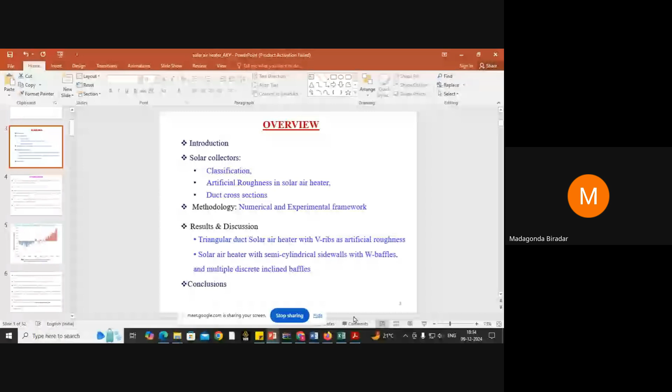Yeah Madhu, can you hear me? Yes sir, your voice is audible sir. Okay, thank you. Sir, you can share your screen sir. Yeah Madhu, yes sir, it is visible sir, is it visible, my PPT? Yes sir, yes sir, okay.

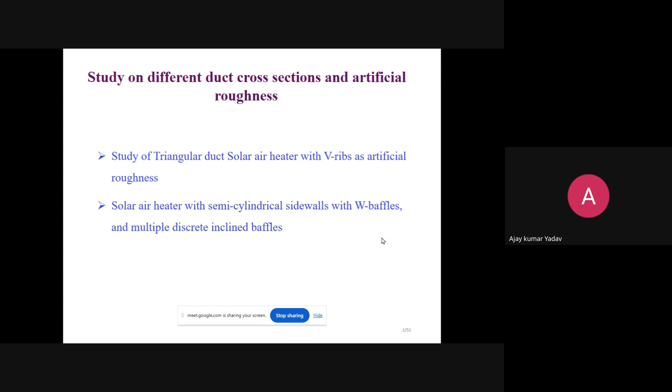Mainly I'll talk on two broad areas here. One is study, meaning my research part: study of triangular duct solar air heaters with V ribs as artificial roughness, and another one is solar air heater with semi-cylindrical sidewalls. But these two areas we'll talk about in the later part. Before that, we'll talk about the introduction, because these things will go in the research part mainly, since not all are from a thermal background, so I will explain that a little bit.

But the detailed introduction will be interesting for all of you. In this I'll go through the different types of solar collectors, classifications, and artificial roughness in solar air heaters. I'll also talk about solar air heater applications and different duct cross sections.

The things I'm going to talk about here are: artificial roughness in solar air heater, why this is required, duct cross sections, then the solution approach - numerical and experimental, mainly the different softwares people are using or writing codes - then some results and discussion, and conclusion.

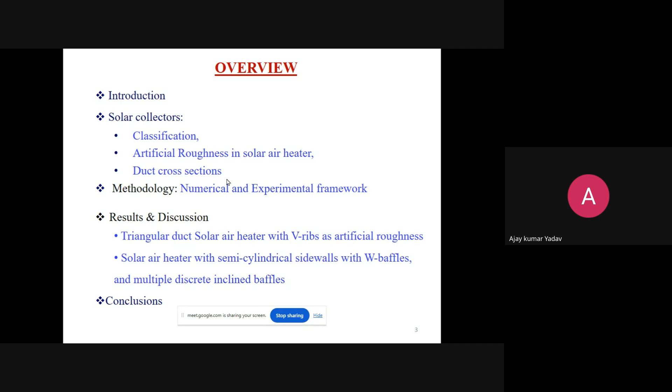This is the very common reason why we go towards the renewable energy side. One major part is the pollution part. We burn fossil fuels, coal, gasoline, diesel, and this is creating pollution. Another thing is the depleting source, so availability is also a question mark after a few years.

So the thing is, we have to move towards the renewable energy side, and sun is the better option always. But how much we can harness from the sun, that matters now. So how to increase the efficiency, those things we should think of. So one thing is, why not photovoltaic? Photovoltaic cell, the efficiency is very less, you know that.

Photovoltaic cell is having efficiency of around 15 to 20%. Generally you can consider 15 to 18% in this range. So efficiency part is we need to work on that, and we have to increase the efficiency.

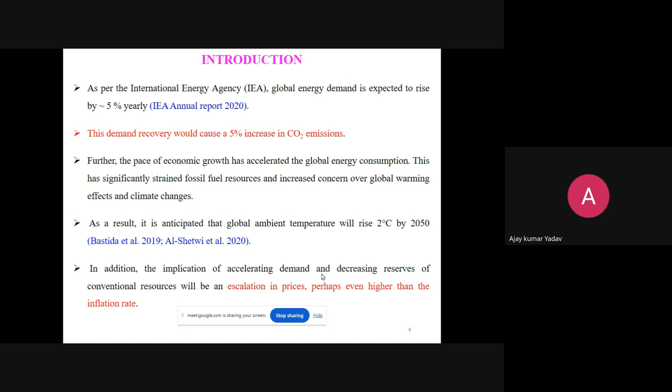But before that, this is the introduction part - first let me talk about global warming and all things. It is better to go for solar. It is expected to increase 2 degrees Celsius by 2050, this ambient temperature, global ambient temperature. And the escalation of price is even higher than the inflation rate for fossil fuels, conventional sources of energy. So this is one motivation why we are going towards solar energy.

These are the data we can generally get from some reports. In India, gross petroleum import accounted for over 19% of India's total imports in 2020-21. Coal also, India is the second largest importer of coal. So these are the things you can see, how much we need fossil fuel to fulfill our energy demand.

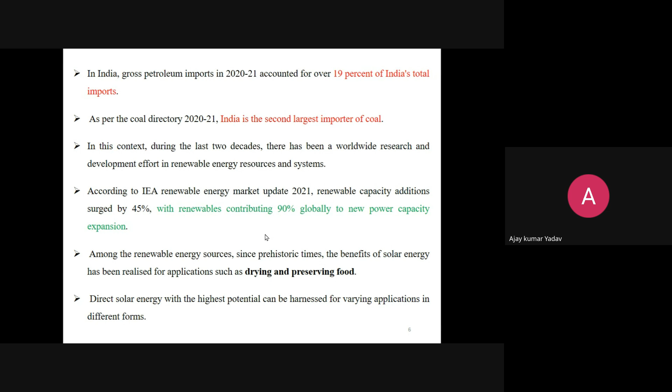Solar energy part, solar air heater, the major application of the solar air heater is in the food industry, drying the food product. Hot air from the solar air heater can be used for various low to medium temperature applications, mainly drying of agricultural products.

For a developing nation, where agriculture forms the backbone of the economy, drying and preserving farm harvest is of prime importance. There are indirect type solar air heaters, direct type solar air heaters, different types we can use.

Another use of the solar air heater is space heating of buildings. In winter season you need hot air. If you use a normal PV cell and electrical heater, mainly in the north side in a very cold environment, that consumes a lot of energy. If you directly use a space heater solar-based system, air heater has less efficiency than water heater because water has better conductivity than air. Even if you get 60%, 50% efficiency, that is much better than the 15% of the photovoltaic cell. So these are the things space heating you can use.

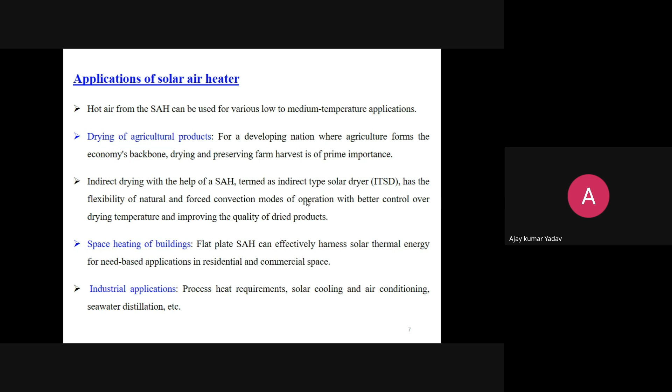Parabolic trough collector and dish type collectors - these are the things. If you need high temperature, you need such type of concentrated collectors. This is parabolic and this is dish type. Dish type, if you use for water, you can go up to 800-900 degrees Celsius. To run a thermal power plant, you can go for this. People have tried that also, solar thermal power plant, and some places it is running.

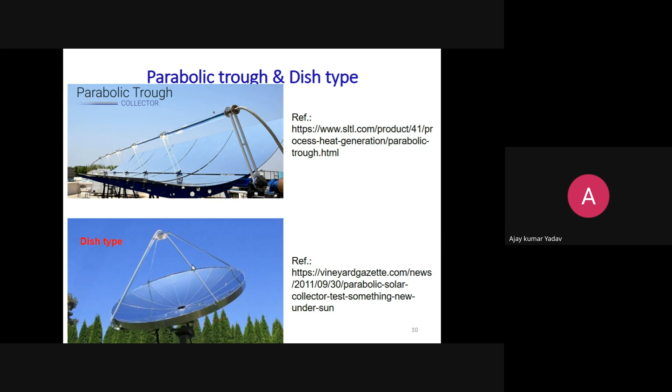But as you go higher and higher temperature, there are losses also - efficiency of the solar collector will drop. Here you are using free energy, but efficiency matters because the photovoltaic cell is easier to handle. Here you need collector part, then turbine part, then generator - many moving components will be there. So initial cost will be very high if you use solar thermal power plant, and efficiency also may come close to 20-25% in that range.

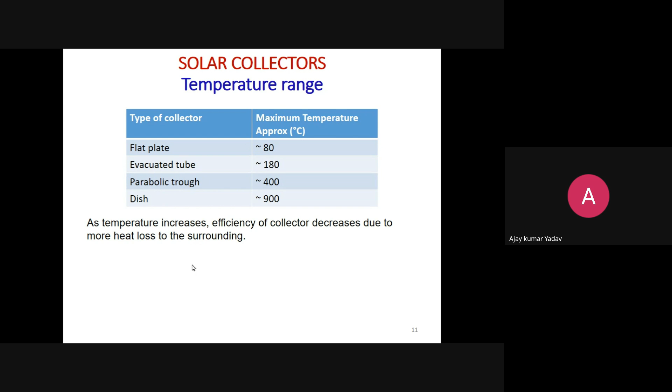You can see the maximum temperature you can get using flat plate, evacuated tube, parabolic, and dish - 80, 180, 400, 900 degrees Celsius you can go. So as you increase temperature, your efficiency will drop. That is the main drawback here.

Now I'll talk about the flat plate solar air heater. Solar air heater generally looks like this. It's simple in construction, very easy to make.

So in that, this is the glass part. Solar radiation will be absorbed here. You can see the cross-sectional view or side view. On the top is the transparent glass cover, and this is the absorber plate. In between, you can create vacuum.

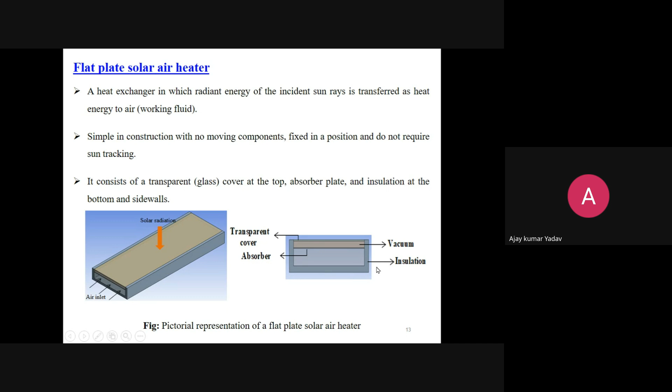There are different types of solar air heater: class 1, class 2, class 3. In some places vacuum is not there. If you use vacuum, the losses will be less. This is the normal construction, with simple side walls that will be insulated. Here air will flow in between this part.

So you can see here the classification of flat plate solar air heater. This one is the transparent cover, the glass, and this is the bottom insulation, and in between on the side. But on top of the insulation is the absorber plate, which will absorb the solar radiation. This will generally be black chrome coated, so like a black body it accepts all the radiation, and it will absorb with absorptivity close to 100%.

So this plate will get heated, the absorber plate, and in between this glass and absorber plate there will be airflow. So when air flows, it takes heat from this absorber, gets heated, and passes through, and after this outlet you can use the air for your application, like drying food products or agriculture products. So this is class 1, type 1 flat plate solar air heater.

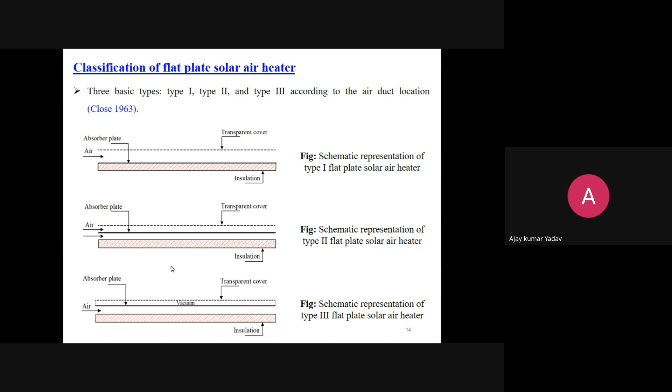Now, the solar air heater has low efficiency compared to a water heater. The reason is air has very low thermal conductivity - this is the one major reason. So how do we improve the efficiency? We need to improve the heat transfer coefficient, which is always higher in the case of turbulent flow.

So you have to put artificial roughness to create turbulence. How to do that? If it's just a smooth normal channel and air is flowing, a boundary layer will be created on the flat absorber plate. Once the boundary layer develops, the heat transfer rate will reduce. At the leading edge, where the plate starts and flow is coming in, the heat transfer rate is always very high.

So that concept we have to think and implement here: we should break the boundary layer. First break it, because a thick boundary layer will be formed, so we need to break it. And within that boundary layer, a laminar sublayer will be formed. So up to the thickness of the laminar sublayer, you have to put artificial roughness, some fins-like structure in that.

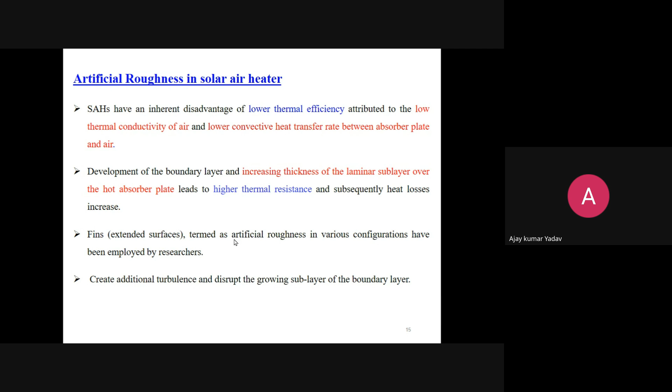Now the thing is, if you are putting ribs, like fin-type structures, there will be pressure drop and Nusselt number will increase, heat transfer coefficient will increase. So two things: one is increasing, pump power is also increasing. So one is favorable, Nusselt number increasing is the favorable condition, but friction coefficient increasing is not favorable.

So there is a parameter called thermohydraulic performance parameter. There's a relation: how much Nusselt number is increasing, mainly representing heat transfer coefficient, and how much pressure drop is increasing. The ratio of these two has a relation, not a direct ratio, and that will say whether it is more than one. It should be more than one, otherwise it's not justified to use, so we will evaluate based on that.

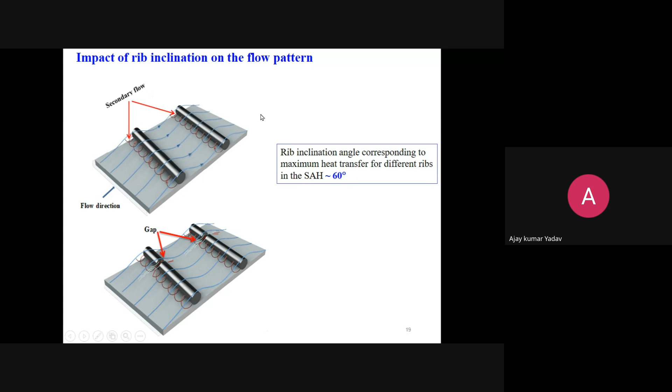Now the impact of rib cross sections. What I showed earlier was a circular, cylindrical cross section of the rib. You can put different shapes: the first one is square, then triangular, with flow coming from this side, and this one is circular. Different people have tried different shapes, such as Singh and Singh 2018.

In recent developments, people have worked on different ribs, different cross-sectional areas, and duct cross-sectional areas, along with ribs of different shapes. So we can see what happens if you put a square type versus triangular or circular shape. The square type is a rough type of structure, this one is slightly smoother than square, and this one is more smooth. If you put a smoother shape, separation will occur late, whereas in the square case it starts right at this point.

Here it is starting. Slowly it is getting delayed on this side. So smooth - if it is streamline flow, you should have this smooth surface. But with streamline flow, we don't want this. We want turbulence, more turbulence in this.

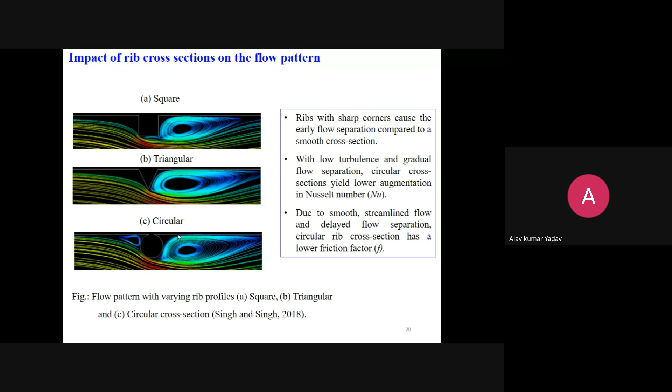So for that, we have to compare the Nusselt number of a rough surface and a smooth surface. Rough means with rib, and smooth surface - what is that ratio? And friction factor, rough and smooth, what is that ratio? The friction factor ratio we have to raise to the power 1/3. That gives you THPP, which we calculate and then compare.

So these are the summary of research, the recent developments in solar air heater. Various types of ribs people have tried, some different cross sections also. There are many experimental studies done in this area, more experimental studies compared to CFD analysis.

So now people have started more on CFD also. Another thing is duct cross sections - people have not used different duct cross sections, there are fewer papers on this. The reason is flat plate and rectangular duct cross sections are easy to build, so people have used rectangular type more.

So what we will now - okay, one thing is I'm not able to see. Are you able to? I think Madhu, you can hear me, no? Not disconnected? No sir, you are audible. No problem, okay. Once I shared this screen, then I'm not able to see that side.

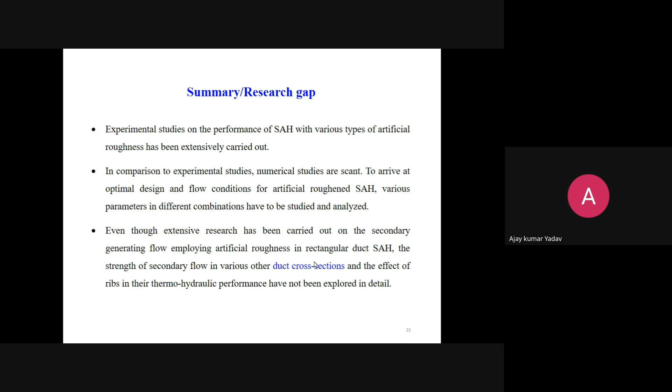So the next part is we are going to start this research methodology part. People have done numerical and experimental studies - oh sorry, I wrote both same here, numerical and experimental I wanted to write actually. So the numerical part, how to do numerical studies, I'll talk a little on that, and then the experimental part, how to do experimental study.

So the thing is, if you are doing research on this, I'll just tell you - this area, solar water heater, solar air heater, is going to become almost a saturated type of area. There is not very much to do in this, because people have already done a lot of work in this area.

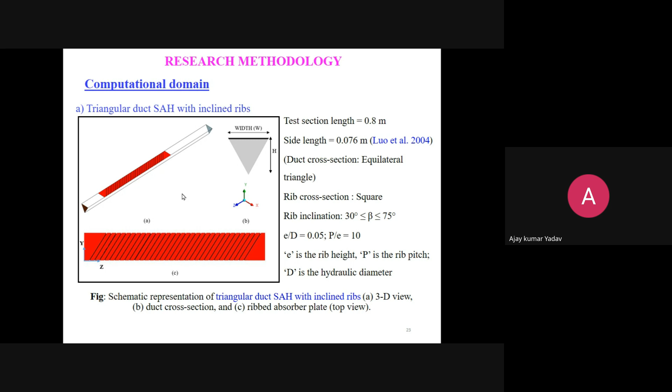These ribs here, you can say inclined ribs, are taken at different angles - we varied the angle, pitch, and roughness height. These things we varied. You can see here the V-type ribs we are using. The second one is triangular duct with V ribs.

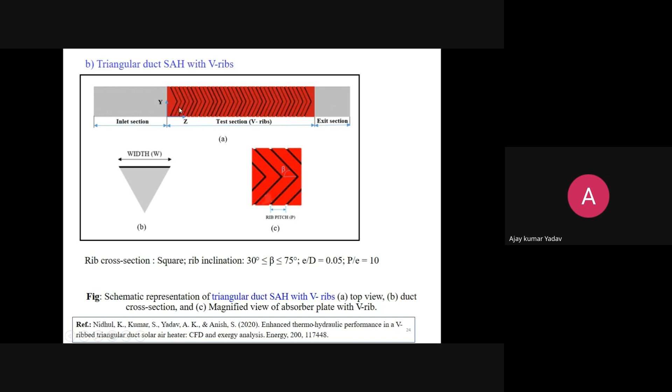One more thing is, if you are doing research, you should be careful about the inlet section - how much you should take, how much exit section should be there. This is an important part. Some people make a mistake here, they take the inlet section at some random value. That won't work, your paper will get rejected straight away. So you should see what the ASHRAE standard says - you can see my paper and other papers, reference them to see what should be the inlet section, exit section, and how long the test section should be. Because if you use a smaller or bigger size, the average temperature value will vary, and your result may not be validated with the published data. So you should follow the standard, ASHRAE standard, for how much length you should take.

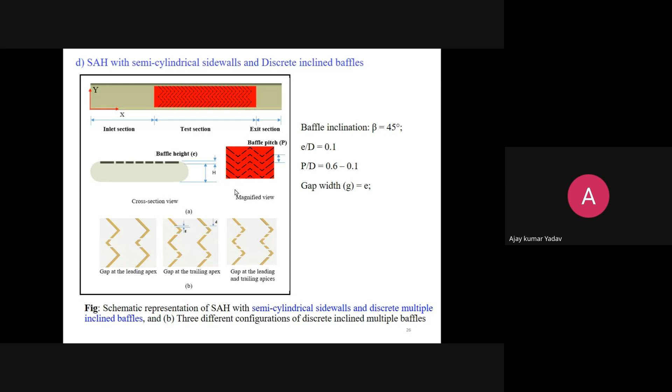So meshing you can do using ANSYS software. Two things mainly you have to find out: friction factor and Nusselt number. Once you find these two, then the ratio will give you the thermal hydraulic performance, and that is what you should compare. That is the non-dimensionalized number - even these are all non-dimensionalized only, this Nusselt number and friction factor.

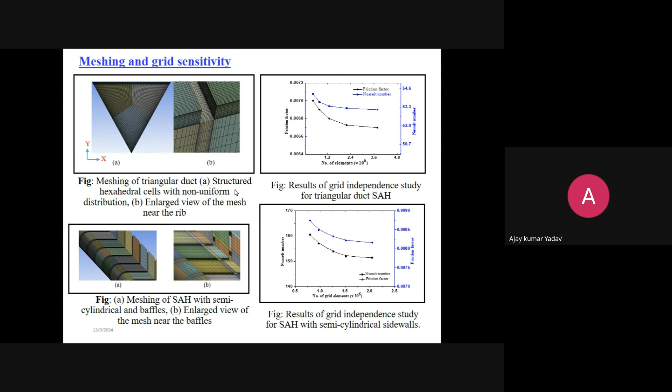You can see this - what duct size you should take, and what boundary conditions you should take here. You can see on the absorber plate, we are putting heat flux of 1000 watt per meter square. Generally the solar constant - you might have heard of solar radiation, how much is falling on the Earth's surface - solar constant is measured above the atmosphere, where it's around 1400 range, 1361.

Because we are doing the experiment on the ground, here it will be around 1000. It will vary, won't be constant throughout, depends on weather conditions and all. So we have taken here 1000 watt per meter square heat flux. This is outlet pressure, atmospheric pressure, adiabatic duct walls - these are the boundary conditions we have taken. For the duct inlet, we have given some velocity.

Okay, so different Reynolds numbers we have studied here: 4000, 8000, 12,000, 16,000. First thing is how to choose the turbulence model. We selected different turbulence models and chose which is best suitable. You can see the Dittus-Boelter correlation, the very famous correlation for Nusselt number, and we can see it is close to RNG k-epsilon. Based on that, we have chosen the RNG k-epsilon model. So you can try different conditions, different types of geometry, and select the turbulence model.

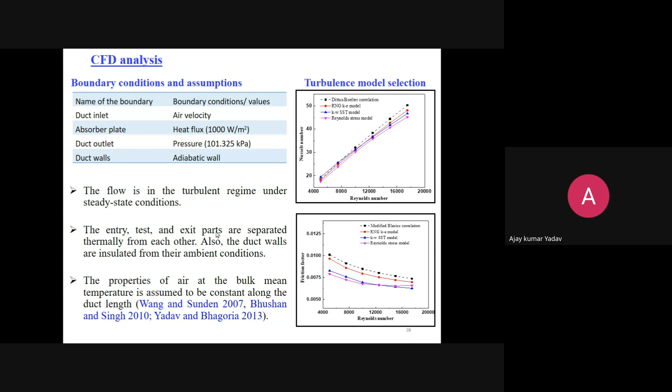Here you will see what I was telling about thermohydraulic performance parameter, THPP. There is the Reynolds number definition, these are the basic parts, and heat transfer coefficient, how to find this. Here people often make mistakes. This Q we are supplying, like 1000 watt per meter square. TP and TB you will find using experimental work or CFD studies. In CFD study you will find TP, TB with the average temperature. TB is the bulk mean temperature. How you are calculating this matters.

Also, if you take a smaller size of the test section, this will vary, and your data may not match. So these things you have to be careful about.

Nusselt number you calculate, then friction factor based on the pressure drop, you will be able to calculate this. Once you have both, the thermohydraulic performance parameter will be Nusselt number of the rough surface divided by Nusselt number of the smooth surface, the normal value. Without putting ribs, you get one Nusselt number, and with the rib, how much Nusselt number. The ratio gives you how much increment there is. Then friction factor with rib and without rib is divided, because more friction is an unfavorable, not desirable condition.

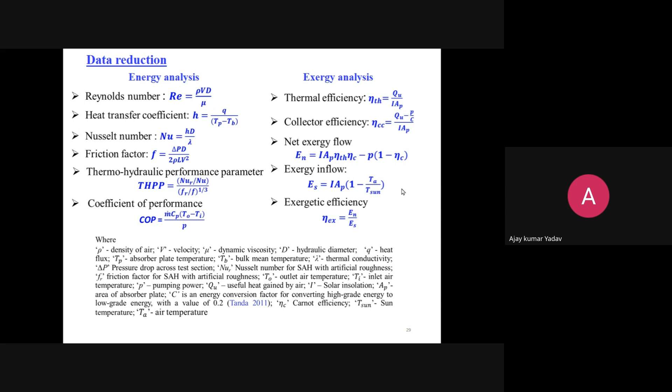This is the experimental setup of a solar air heater with semi-cylindrical side walls and discrete multiple inclined baffles. This type of baffle we made for this experimental study. You can see number 2 is the test section here. From the outer side it seems like a rectangular channel, but it is not. Inside, we have put a semi-cylindrical channel, so people can study different cross-sections. There are fewer papers in this area, so if you are working, you can try this too.

You can see here how to put the thermocouple, on the back side. You can put 3 here, 1 here, then 3, 1, 3, like this. In between the main and at the center, you get a temperature profile because more thermocouples are there. The more thermocouples you put, the better the average temperature value you get. People often just divide the outlet by 2, but that will not give you the exact value—you should put more thermocouples. That's the reason if you go for CFD study and experimental study, there will be a difference in the result.

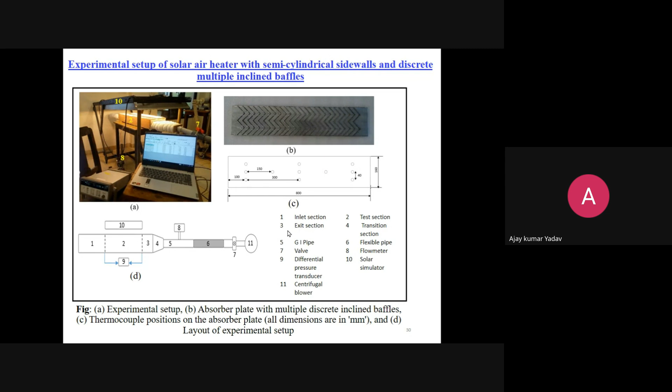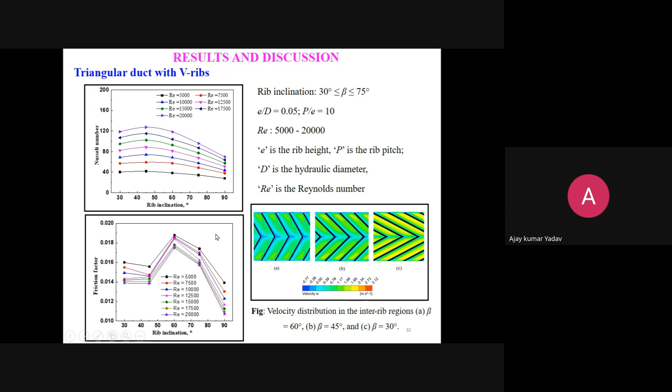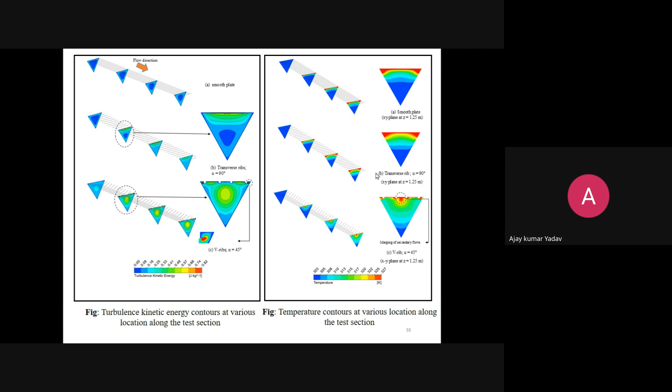So these are the different types of contours, you can plot nice beautiful plots in ANSYS Fluent. If you write code instead, getting this type of thing is slightly difficult, and you have to do the 3D coding with the turbulent model implemented.

So this is for the triangular duct thermohydraulic performance. The final comparison should be made using the thermohydraulic performance parameter - this will give you the exact comparison. Otherwise, Nusselt number may vary, but friction factor may also increase, so you cannot decide which one is better. The best thing to use is this parameter, thermohydraulic performance.

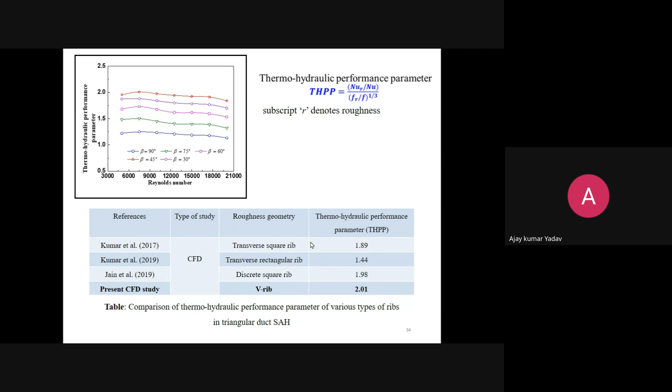Source temperature we consider here is the sun's temperature, which is very high. So however much you are able to utilize, that gives you the exergetic efficiency. This gives a very high first law efficiency, Carnot efficiency, because you're using the sun's very high temperature, but utilization is very low here - very low how much you can use, because the plate temperature you reach will be around 60, 70, or 100 degrees Celsius.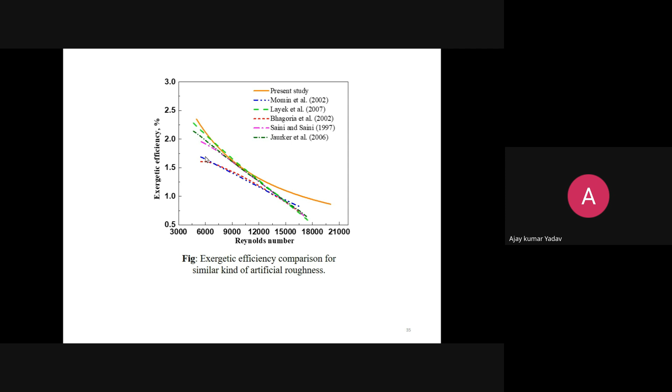So this much you are utilizing and getting the efficiency - the heat engine efficiency with sun temperature is very huge, so the ratio will be very less. That's the reason we are getting 2%, 3% exergetic efficiency in that range. This depends on which formula you are using for exergetic efficiency, but most people use the same one, so for comparison purposes we should use the same formula.

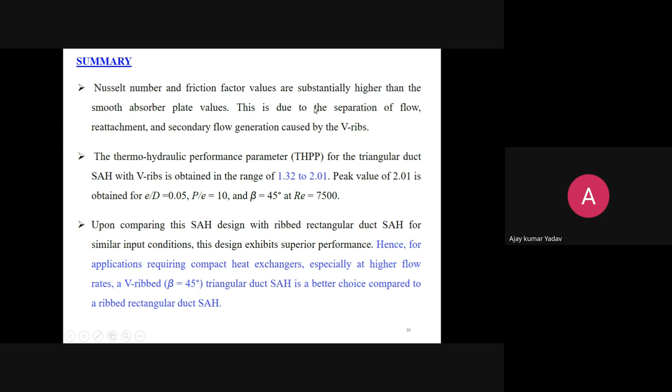This is the summary of this part we were doing for the triangular section. As I told you, we are getting 1.32, 2.01 thermohydraulic performance.

In this, we have taken a different rib, with inclined ribs. First one was without ribs, here we are putting inclined ribs. So here we have put different ribs and we get this type of graph comparing THPP between ribbed triangular duct and rectangular duct. Same rib we put in both the rectangular duct and triangular duct, then compared it. Using the rectangular duct, you get around 1.6, 1.5, the red one. And black, around 1.7, 1.75. This much difference if you use triangular in place of rectangular duct, so there will be advantage in this.

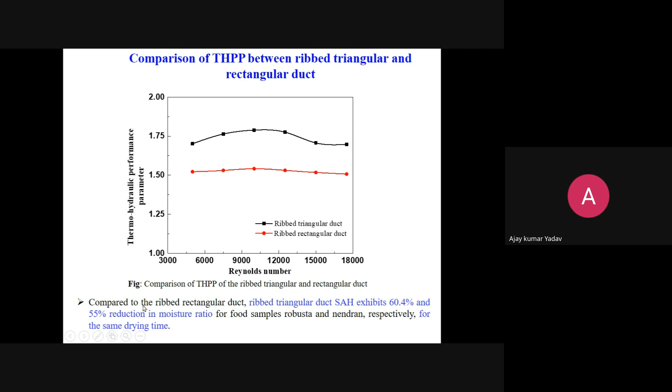Getting around 60.4% and 55% reduction. This is the moisture ratio. We tried experiments using this solar air heater for drying food products, banana and all.

So this is the summary of the second part. We'll go to this one: semi-cylindrical side walls and W-baffles. We have done CFD as well as experimental work for this. If you compare these two types, this is the rectangular one, this is the semi-cylindrical side walls - you can see it is smoothened. In the corner part of the rectangular, extra vortices were there; in the semi-cylindrical, that is gone, not there. So this is giving slightly better results.

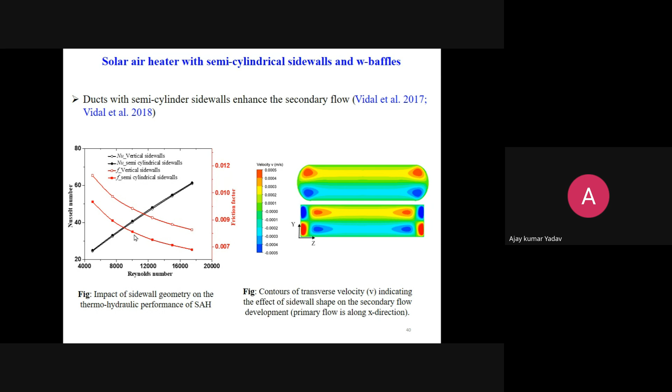This is the validation part - Nusselt number and friction factor with vertical side walls versus semi-cylindrical side walls. You can compare the Nusselt number - there is no change, almost same. But friction factor, there is a change. Vertical side walls have higher friction factor, but semi-cylindrical has lower friction factor. So Nusselt number is not changing, but friction factor, your pump power will reduce in the case of semi-cylindrical. This way you will get higher THP ratio.

Another thing is, if you put inclined ribs, there will be secondary flow, as I explained earlier in the introduction. That secondary flow creates additional turbulence. On this side you can see the secondary flow, how it is coming. So that enhances the heat transfer rate, or Nusselt number, you can say finally.

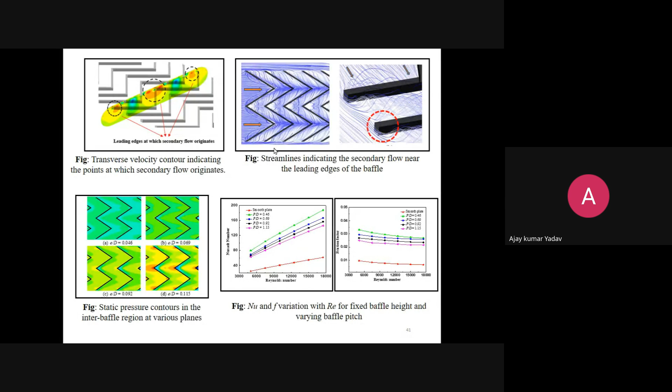So with semi-cylindrical side walls, you are getting around 2.27. You can see the changes. These are all rectangular, different baffles - you can say W baffle they have used here. They got 1.8, 1.9, around 1.98, close to 2. Here we are getting 2.27. This much change.

So let us see thermal efficiency here. This is the thermohydraulic performance with different pitch and ribs height. Comparing thermal efficiency, it is going around 72%, 71 to 72% in that range for present studies.

As I was talking earlier, efficiency has to increase, and this efficiency of 70%, if you compare with the photovoltaic cell, that is 15%. It's very high, 5 times higher. So for drying products, this has scope - this is a better choice.

So these are the things I already talked about. We are getting 2.27 here for THP. And you can see the exergetic efficiency part is around 0.02, meaning this is not a percentage - it will be around 2%.

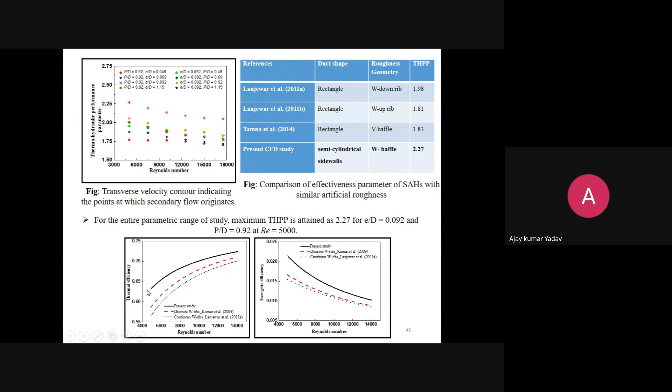You can see here the enhancement in energy efficiency and exergy efficiency - both I just showed you, the thermal efficiency is called energy efficiency. You can see the enhancement with this much you are getting.

And this is solar air heater with semi-cylindrical side walls and multiple discrete inclined baffles. There are multiple, but this is discrete, not continuous - till now we used continuous. This is discrete. If you use discrete baffles, this will give you thermohydraulic performance around 2.8, 2.7 in this range. If 2.69, yes, it is written here - 2.69. Here 3.07 - that is the friction factor increment.

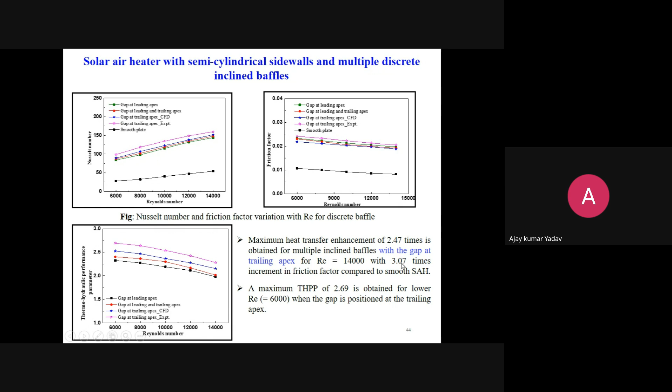2.47 times is obtained for multiple inclined baffles with the gap, for this times increment in friction factor. This 3.07 is the increment in friction factor - we don't want this increment in friction factor, we want increment in Nusselt number. So total Nusselt number increment is 2.47, and in this 3.07, the ratio you can see is 2.69, because here we have 1/3 in the friction factor, which is not the direct ratio.

So this is the semi-cylindrical side walls with square cross-sectional rib with discrete rib - you can say W type discrete rib. In the present study, we are getting 2.69 here.

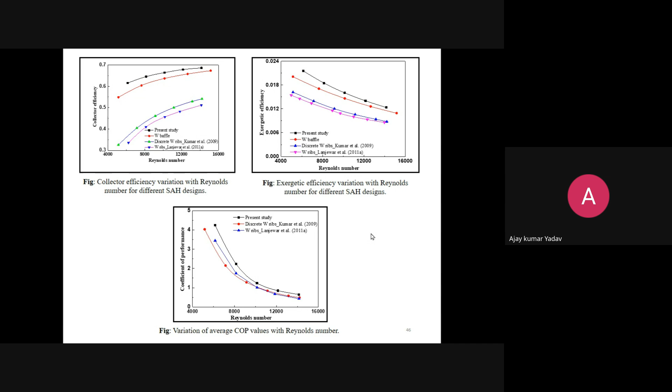These are the summary, almost the same thing is here. Up to 70% we are going to higher collector efficiency. And the other conclusions, details, what I already talked about in that.

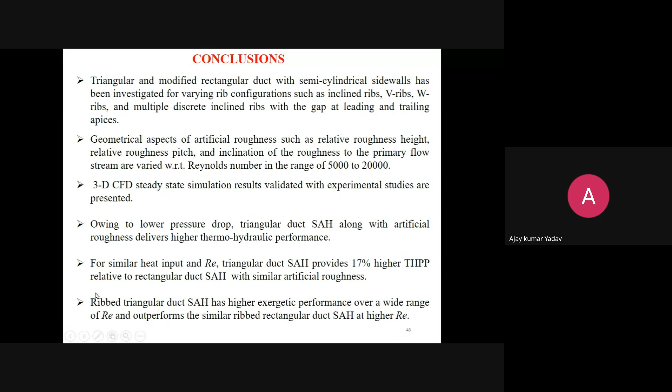We are getting, yeah, almost as I already explained, this 3D CFD steady state simulation we have done - 17% higher THPP case in this triangular, and semi-cylindrical 38.7% in exergetic efficiency we are getting.

This is okay, so most of the things I explained. If you have doubt, you can ask, and we'll go to the final scope of future work. What were the things earlier - also I was talking about this. What you can do is choose different types of cross section and do different rib combinations. That is one thing.

And the sharp corners of the duct can be smoothened, and you can focus study on that - how to increase the heat transfer in the corner area.

Flexible ribs - one idea is flexible ribs or turbulators can be employed. This will be a good idea, flexible ribs and turbulators, to reduce the additional pressure drop that mitigates the potential gain in heat transfer rate.

Phase change materials also you can use. If you use phase change material, your collector temperature will be almost constant. If you put the phase change material in the collector plate itself, then it will be almost constant - it will melt, and it will not rise. Sometimes, if you are not able to extract heat, temperature will rise and losses will increase. So the higher temperature is not good in solar collectors - higher temperature will create more losses. So that's one thing, if you use phase change material, that also will be good.

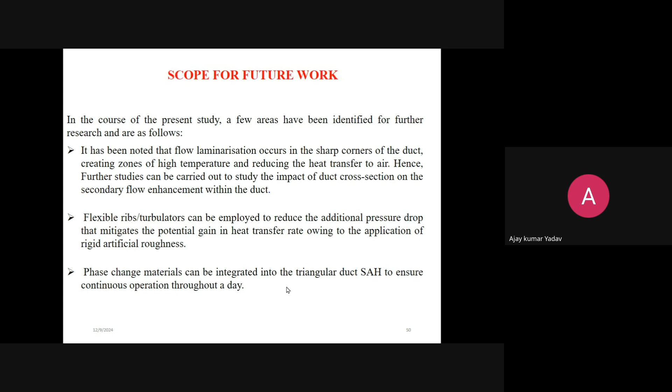Another thing I wanted to mention is, if you are working on AI and ML, artificial intelligence, machine learning, you can also write code, because there is a lot of data available. That data you can use and generate some correlation - train using some data, write code, and get some correlation. That way also you can publish a few papers in this.

These are the references. Just acknowledgement - this study was carried out by my student Dr. Nidul, under the supervision of myself and Professor Anis at NIT Surat, under the research grant funded by DST, Department of Science and Technology, New Delhi. So thank you very much, and now please, if you have any questions, please ask.

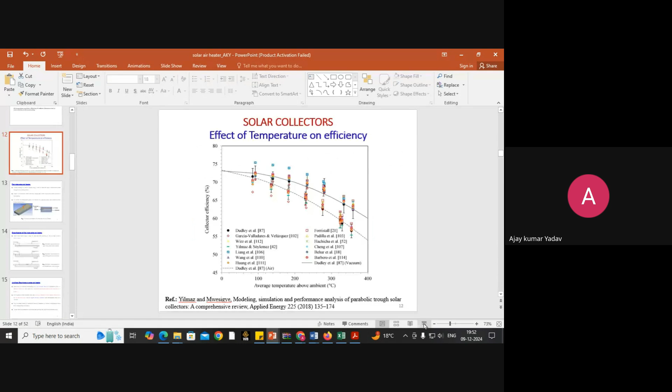This one, right? Yeah, sir, right sir, same. So what you wanted to ask in this? Like what was the reason that with the increase in average temperature, the efficiency is going down. Okay.

See, the main disadvantage of solar collector is we cannot insulate the top part right now, because the solar radiation should come inside. Yes sir. So we cannot insulate that, we can only insulate the bottom. We can reach up to minimum or almost zero heat transfer rate from the bottom side or side walls, we can make good insulation there. But the top part we cannot remove, no? Top part we don't have an option how to insulate it.

That glass has to be there and the radiation has to come in through that. So what happens as your temperature increases, that air temperature or water temperature in the solar collector, at higher temperature if you are operating, there will be losses towards the glass side. That is the open glass, through the glass there will be losses. Glass has some conductivity, so conduction loss will be there.

That you cannot remove. There will be vacuum also in that, people create vacuum too, and in that also there will be some losses, since complete vacuum you cannot create. Okay, and there will be some infrared losses, infrared can cross that glass. So these are the issues actually, that is the big problem. You cannot insulate the top part, so top loss will always be there. So to reduce that, there are double glass designs, different vacuum levels we create. So in that we can improve efficiency a little bit.

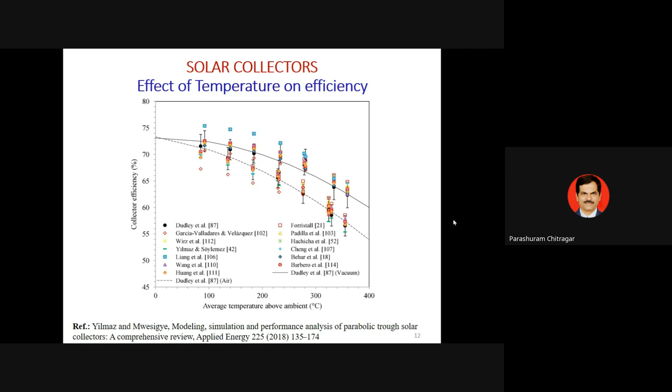Okay sir, yeah I got it sir. Okay, second question was related to the relative rib height and pitch. Can you tell me which value to use for height and pitch, relative rib height and relative pitch, out of the rib height? This thing I've given here some 0.03 to 0.05.

This you have to study, different cross sections if you have, different types of ribs if you have, it will vary. So I've given just approximate data, it may fall in between, and for some cases it may exceed a little bit, not much. So this range I have provided here, it depends on you. If you do the study here, CFD simulation, you will get the optimum value. Based on that, you can make the experimental setup.

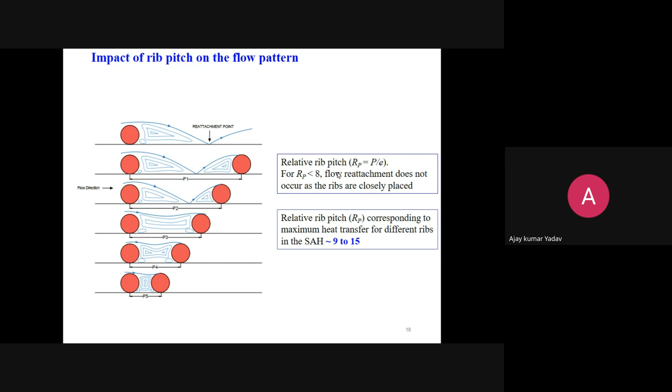Okay sir. Okay, these data I have given here, that's the reason, 0.03 in this case, and in this case 9 to 15, this is how much the gap is. It will vary for different Reynolds numbers. Right, there are many things, there are hydraulic diameters, it will vary with the hydraulic diameter also. Right sir, okay.

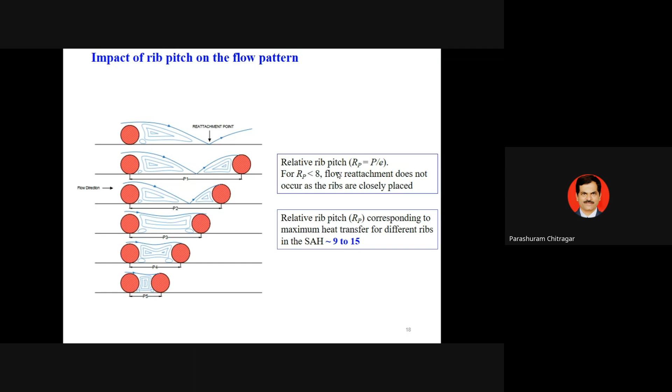One of my PhD students is working on the same thing, investigating the effect of some aerofoils, macro aerofoils. That type of thing you can also use here for enhancement of heat transfer characteristics, particularly in tube flow.

So will we go for the same Dittus-Boelter correlation if it is going to fit in a turbulent region? That you can go with. One thing I will suggest: this aerofoil type of shape will have less pressure drop, but how much it will enhance the Nusselt number, that you have to check - whether there is improvement in Nusselt number.

So if it is a fluctuating type, suppose it is moving? No sir, moving means... No, right now we are not thinking of a moving part. We are going stationary, fix it. Yes sir, stationary only.

If you put some spring and connect it, it will automatically move up and down. That type of thing you can try. Fine sir, experiment you can try different ways, but getting the results in CFD will be difficult. Okay sir, let us see the feasibility.

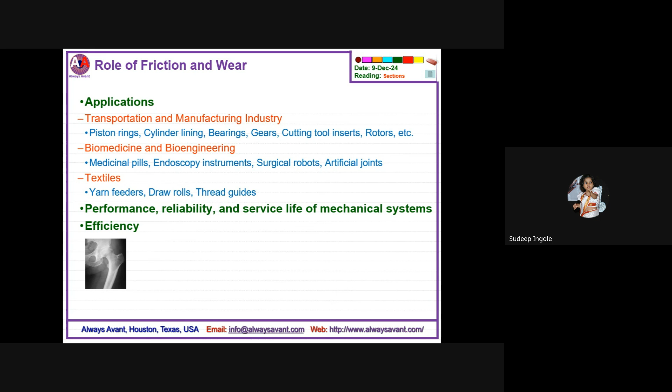Let's discuss some of the facts about the friction and wear losses that can occur to mechanical systems. Resources wasted at the interfaces can add up to more than $40 billion per year, that is alone in the US. Now think about the rest of it all - think about overall the area where these losses can occur. Some of these losses can occur at interfaces such as piston ring cylinder, interface tools, workpiece interfaces, drills, and hole interfaces.

Do you know that tribological improvement in the automobile sector alone, if we have better performances of these systems, we can save around 18.6% of the total annual energy consumption by automobiles? The saving will be in several tens of billions of US dollars. Now, that is motivational enough to be involved in tribological inquiries to make a contribution to the country's energy saving, isn't it?

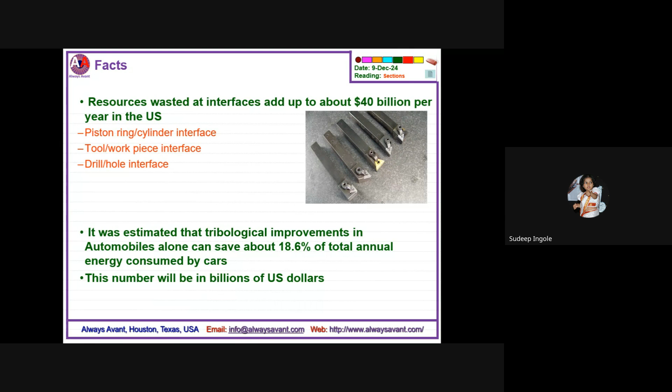Now, if we add another component to friction and wear losses, that is corrosion, you can see the cost of corrosion that impacts the US economy. I took these numbers a little older, but you can relate and calculate those into the current situation.

The US GDP in 1999 was $8.79 trillion US dollars. In 2006, the US GDP was around 13.13 trillion US dollars, and current GDP is around 21.43 trillion dollars. The direct cost of corrosion is around 3.1% of that.

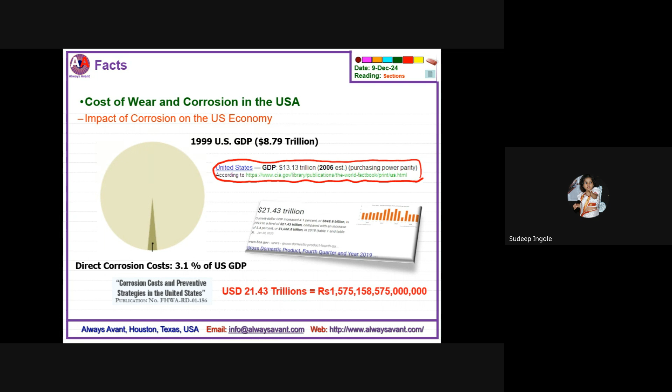With this, in the next few slides, we will return to our understanding of some very fundamental parameters that we can implement in our inquiries, which can reveal very important information and its application to real life areas.

So one of those measurement parameters is the surface finish. Surface measurement is governed by the ASME standard B46.1, and this parameter usually measures the surface roughness, waviness, lay, and unrelated damages.

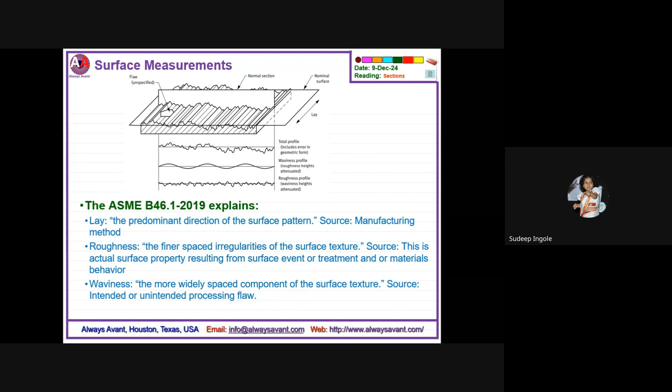Let's talk about some of the individual surface parameters. There are several parameters that can be calculated from the surface profile. These parameters will be discussed in the following sections in a little more detail.

Some of the parameters of prime importance include average surface roughness, root mean square of the surface roughness, maximum profile peak height, maximum profile valley depth, maximum height of the profile, average maximum profile peak height, average maximum height of the profile, maximum roughness depth, mean spacing of the profile irregularities, and the peak densities. We will discuss some of these parameters.

For example, the arithmetic average. We'll talk about parameters such as R sub A and R sub Q, and the full list is given, but we will cover the calculation of individual parameters later. R sub A is the arithmetic average deviation of the assessed profile, whereas R sub Q is the root mean square deviation of the assessed profile. We will discuss each of these individually, eventually.

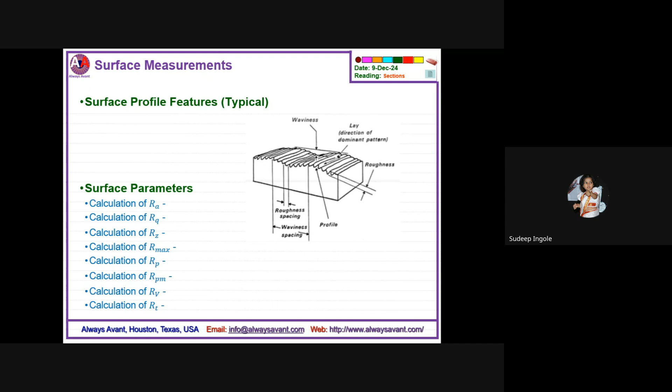In order to calculate these parameters, the most important thing is that the measurement itself, the profile sampling itself. So in order to calculate these profiles, we have a couple of different length parameters that we need to consider. One is the traversing length. This is the length determined to select the evaluation length.

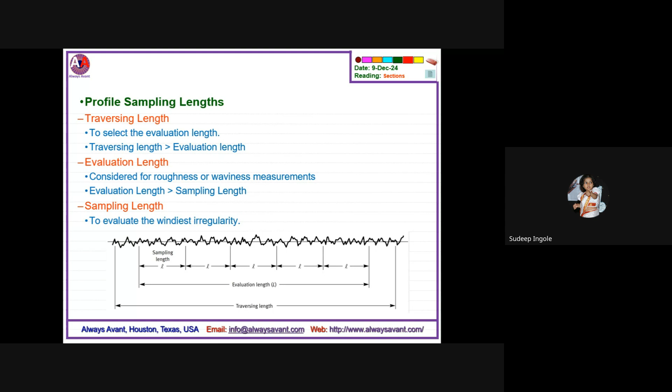Traversing length is always larger than the evaluation length to eliminate the end effects of the measurement tool. Second one is the actual evaluation length, the length used for roughness and waviness measurement. And third one is the sampling length, the profile length to evaluate the widest irregularities. Sampling length is always smaller than the evaluation length, and that is given in this particular cartoon about all the different lengths. Let's go to the next about surface measurement, surface parameters.

We will discuss how to calculate some of the parameters from the surface profile taken. Let's talk about how to calculate the average surface roughness. Calculation of average surface roughness, which is denoted by R sub A. Average surface roughness is denoted by capital R and with subletter A, where...

In terms of mechanical engineering, I think this is one of the topics that is being learned in some of the courses, if the syllabus is not changed. The average surface roughness is denoted as R sub A. This notation is commonly used in the United States, and it is also defined by the ASME standard.

Surface roughness or the average surface roughness is defined as arithmetic mean deviation of the surface peak and the valley from the mean line. And it can be given with this simple formula.

The applications of average surface roughness, as you consider, are why average surface roughness we need to calculate. Surface roughness is most commonly used. First thing is it's a very widely used parameter in order to calculate or relate the surface performances. Second, surface roughness measurement...

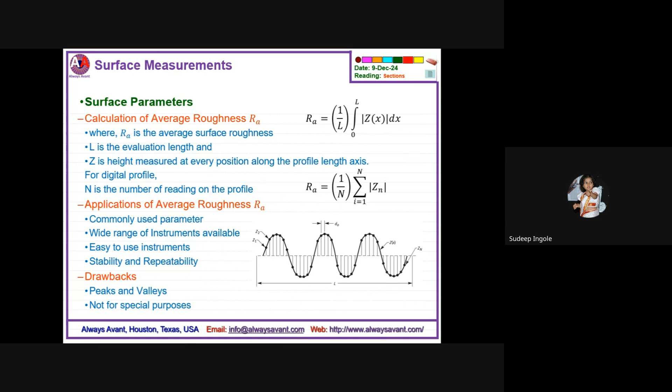Let's move to the next parameter. Let's discuss how to calculate RMS roughness, which is denoted by R sub letter Q. RMS roughness is defined as the root mean square deviation of the surface profile from the mean. RMS roughness can be calculated using this formula.

I'll not go into the details of the formula. I can hand over the slides so you can refer to the formulas. I would like to just give the overview so that we can focus onto the wear and energy losses section of the presentation.

In this formula, the length is L, which is given as the evaluation length. That is very important to consider. And Z is the measured height at every position along the profile length of the axis. For digital profile, RMS surface roughness can be calculated using this equation.

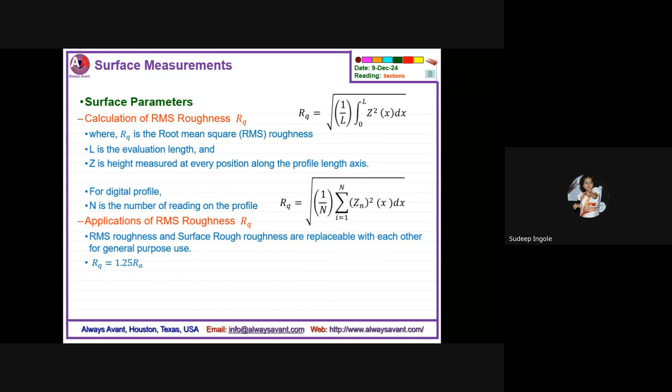What are the applications where RMS surface roughness is being used? It is very similar to surface roughness and can be replaced with each other for general purpose use. For Gaussian distribution of the surface height, RMS roughness is equal to 1.25 times the surface roughness value. So RMS roughness is used to control surface, which is used in particularly scientific purposes.

The next parameter is maximum profile peak height, that is R sub P. It is calculated as the highest peak of the profile from the mean line along the evaluation length.

The next parameters are little less significant. The most important parameter that is being used is R sub A. So average maximum profile peak height, this parameter is calculated as the average of the successive values of R sub P, measured over the evaluation length.

Next parameter is maximum profile valley depth, that is R sub V. It is the depth of the lowest point of the profile from the mean line over the evaluation length. Whereas maximum height of the profile, R sub T, is the distance between the highest peak and the lowest valley depth point of the profile within the evaluation length.

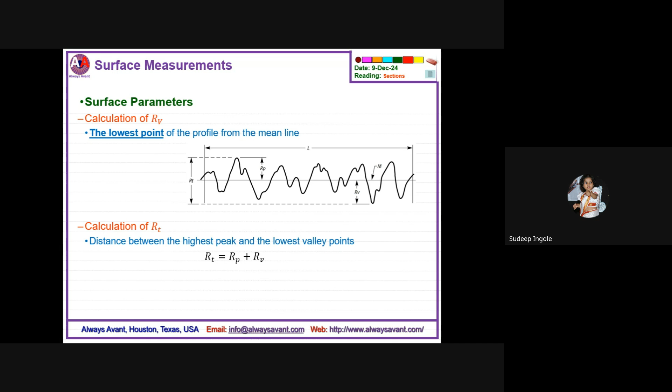The next parameter that can be considered is R sub Z, the average maximum height of the profile. It is calculated from the R sub T measurement. It is the average of successive values of R sub T calculated over the evaluation length. And the maximum roughness depth, R sub max, is observed from the R sub T measurement. It is the largest of the successive values of R sub T calculated over the evaluation length.

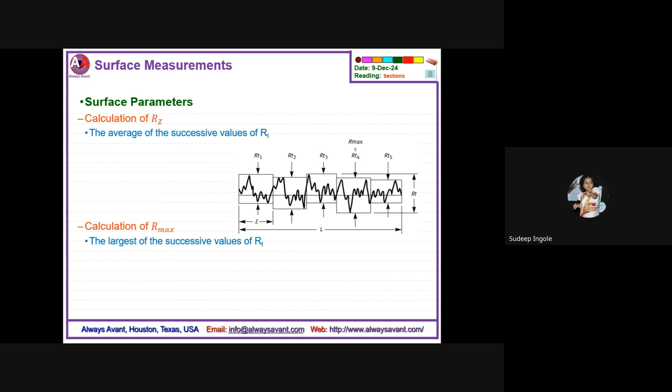The amplitude density function, which we can also refer to as ADF, is the probability density of the surface height. The amplitude density function is normally calculated as the histogram of the digitized points on the surface profile over the evaluation length.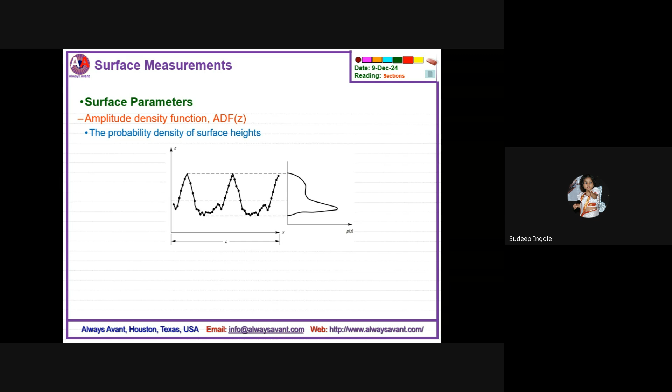And there is one more important parameter, that is the profile bearing length. This is defined as the summation of the section length obtained by truncating all the profile peaks with a parallel line to the mean line within the evaluation length. The height of that line from the mean line is specified by P.

How does the height of P, or we can also refer to it as rho, from the mean line get specified? As the length from the highest peak with an optional offset, and as a height from the mean line as the percentage of R sub T value relative to the highest peak.

Another parameter is what we call the bearing length ratio. It is the ratio of the profile bearing length to the evaluation length at the specific level of rho.

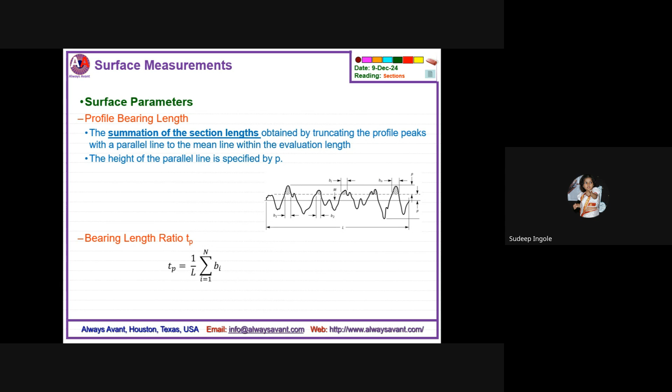The next parameter is bearing area curve. It is also called the Abbott-Firestone curve. It is related to cumulative distribution of ADF that we already saw. It shows how the profile bearing length ratio varies with the level.

Some advantages of BAC: the bearing area curve is useful to predict the run-in during wear or sliding of the surface, for example cylinder liners, rolling or bearing surfaces, surfaces like coatings, electrical contacts, and seals, etc.

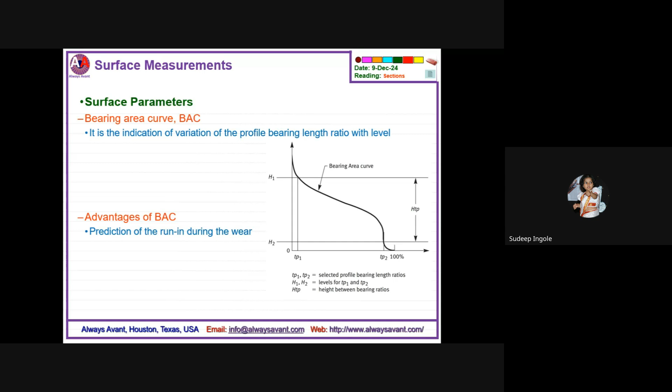B is the production method, treatment, coating, and it also gives the note for call out, or some other parameters also can be included here.

C is the surface cutoff or sampling length. D is designated as direction of lay, and E is minimum material removal requirement, and F is roughness value other than R sub A preceded by its parameter symbol. For example R sub Z, or you can also mention the value of any other parameter other than R sub A.

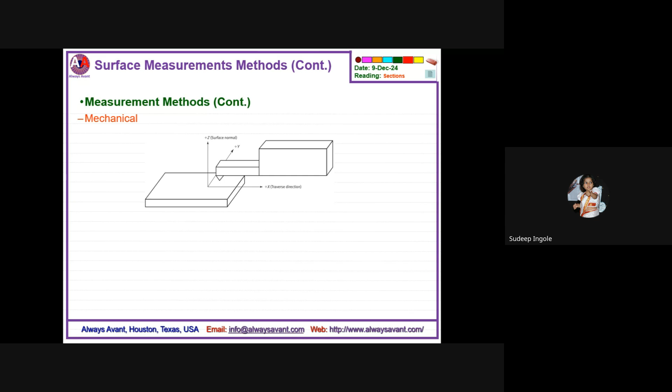Now, where are these particular parameters or surface roughness being used? There are many different industries where this surface roughness, simple tool measuring the surface roughness, plays a very significant role.

And some of the industries which are benefited actually in order to save the dollar amount, the energy losses, because of this simple tool.

So some of these industries are dairy and food and beverage industry, medicine and biomedical industry, oil and transportation industry. What exactly is the application of surface roughness measurement in the dairy, food and beverage industry? Can you think about where exactly the surface roughness plays a role? A very simple tool, but its application is at a very huge scale actually.

The average household purchase of a dairy product. Think about in an Indian household family, how many products do we use that are derived from dairy.

In the US it is even at a higher level. It generates a multi-billion-dollar industry, the dairy industry. Where do you think the surface roughness parameter comes into picture? Think about the containers and handling equipment where dairy products are processed - it's the sanitation of these equipments. To keep these surfaces clean, the ability of the surfaces to be sanitized is governed by a very simple parameter: the surface roughness of those equipments. If these surface parameters can be controlled, and as a matter of fact in these industries the surface roughness or smoothness of the equipment is governed by standards, that will contribute to energy saving or even health-related issues.

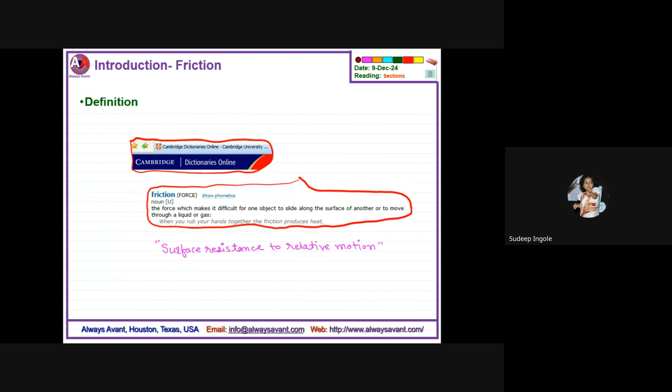But as far as general application or uses are concerned, tribology is a very interdisciplinary field. It is not just part of mechanical engineering. When it comes to studying and developing surfaces, many other science majors can come together and form an interdisciplinary team.

Friction is a fundamental surface response of a material. The concept of friction was used in ancient times, and this particular cartoon shows a very simple method - at that time it was a scientific method to measure friction. This cartoon was taken from one of the books on Leonardo da Vinci. As I mentioned, this is a very ancient method to incorporate friction into study, and there is much evidence that strongly supports the use of this concept. A scientific study of friction was first reported by Leonardo da Vinci, who, as most of us know, was a painter. He was born in Italy and worked as a painter.

He also worked as an engineer and as an architect. You may know that it was Leonardo da Vinci who actually started studying the anatomy of the body. He started drawing the different organs as he was also a painter or artist. This is just a fun fact on the side.

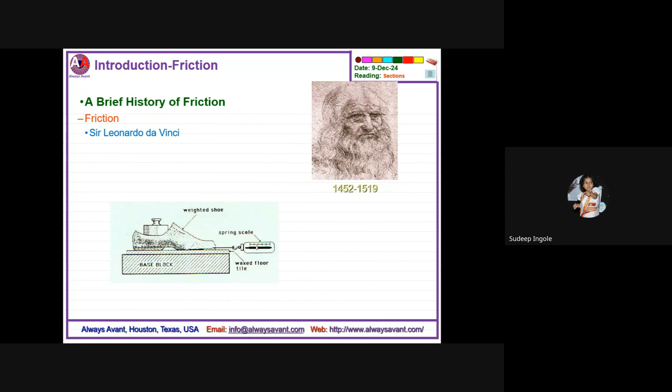It has nothing to do with friction and wear, but he studied very important aspects of tribology. For example, he studied friction, wear, bearing materials, lubrication systems, gears and screw jacks, and rolling bearings, element bearings as well. So in simple words, Leonardo da Vinci's contribution to surface science is very foundational and significant.

In 1699, Amonton's law of friction was introduced. These laws were actually explained by Leonardo da Vinci himself, but his transcripts were all hidden, and they may have been lost. Amonton and Charles Coulomb actually gave a valuable contribution to the tribology study. Their findings are still applicable in engineering problems today. Some of them are listed here, which are applicable to dry friction only.

One is the force of friction is directly proportional to the applied load. Most of us use this particular law even today in our engineering applications. The force of friction is independent of the apparent contact area - that is Amonton's second law. And the kinetic friction is independent of the sliding velocity.

Though there was wide impact of lubrication in everyday life at that time, it took some time to incorporate the effect of lubrication into the studies. Bowden and Tabor developed a theory called the theory of adhesion. The adhesion concept of dry friction was first proposed by another person, Desaguliers, and was applied with great success by Bowden and Tabor in metal-to-metal interfaces. They explained that the force of static friction between two sliding surfaces is strongly dependent on the real contact area.

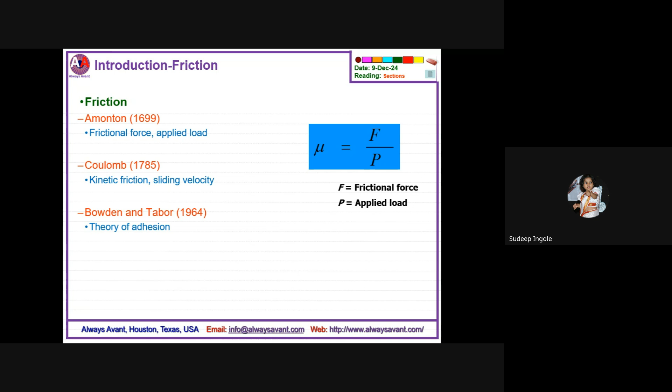They also formulated a simple asperity model of contact based on the Hertzian elastic theory of elastic sliding surfaces. This might be too theoretical, but this theory is very applicable even today when it comes to determination of surface wear properties. They found non-linear friction load dependence, which contradicted Amonton's law. However, both of these laws have application in current scenarios.

So what is wear? Wear is defined as a process of material removal from the solid surface by means of mechanical, thermal, or chemical action. It has advantages as well as disadvantages. For example, writing with a pencil on paper is one example of useful wear, whereas wear of machines is not useful wear.

Wear in tribology is the surface damage due to relative motion of two surfaces, due to the bombardment of one surface on the other, or due to the reaction between the two surfaces or with the surrounding environment. The science behind this failure is explained by what we call wear mechanisms. There are different wear mechanisms or modes of wear: adhesive wear, delamination or sliding wear, fretting wear, abrasive wear, erosive wear, fatigue, and corrosive wear.

Most of the above mentioned wear types involve the adhesion mechanism, which results in wear. The adhesive wear is the most common wear found in metals and alloys, and is discussed next. Let's see if we have a little more time to discuss it.

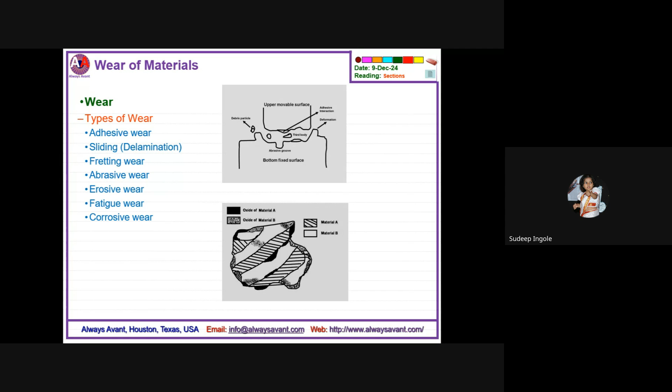And that's how the debris particle forms. This will explain itself, but actually analyzing this particle or debris becomes extremely difficult.

Let's talk a little bit about the adhesive wear mechanism. Even today, there are different wear mechanisms reported. Most metals and alloys wear by adhesive interaction between them, as I mentioned.

This particular theory is based on the Bowden-Tabor theory. When the two sliding surfaces move, shear occurs at the junction. The shear strength of the interface and the metals involved in sliding determines the possibility of fragmentation.

When the interface is stronger than one of the mating surfaces and weaker than the other, shearing occurs within the softer metal, and the detached segment adheres to the harder side of the metal.

When the interface is stronger than the mating surface but slightly hardened, severe shearing occurs at the softer material, and a significant amount of material transfers to the harder material. Shearing of the harder metal also occurs occasionally.

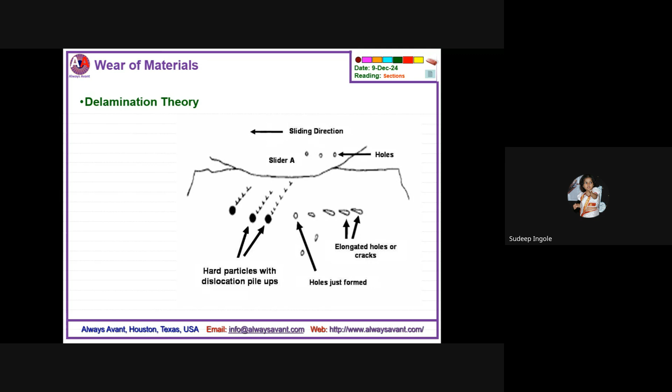You can also relate the dislocation theories in material science to the particular surface damage or debris formation of these sliding surfaces. Another parameter we can calculate from this area is how much material is lost.

Or what is the rate, actually, in order to determine the rate. The loss of material is very important, because that can be related to other parameters or actions by the engineer.

That is the wear volume by adhesion, which is also expressed particularly for adhesive wear. This was given by Holm, and then Archard in 1953 explained the volume of wear by adhesion, given by this particular simple formula.

The amount of wear is dependent on the load and sliding distance, as given in this formula, and the hardness of the surface. So the material property also plays an important role in determining the wear volume, particularly by the adhesive mechanism. Wear volume can be given by this particular formula, where C is a non-dimensional constant.

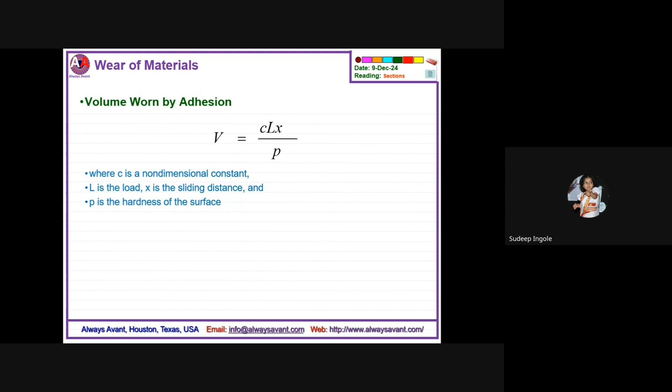Now, these parameters can be easily calculated when you conduct a simple friction and wear sliding test, and we will see if I have time for another couple of slides to show how these parameters can be calculated.

Another important thing is that in adhesive wear, in order to understand what is going on at the interface, two analyses are very important. One is the debris analysis, which becomes significantly complicated because a lot of things happen during sliding. The second is the metallurgical analysis of the debris particles.

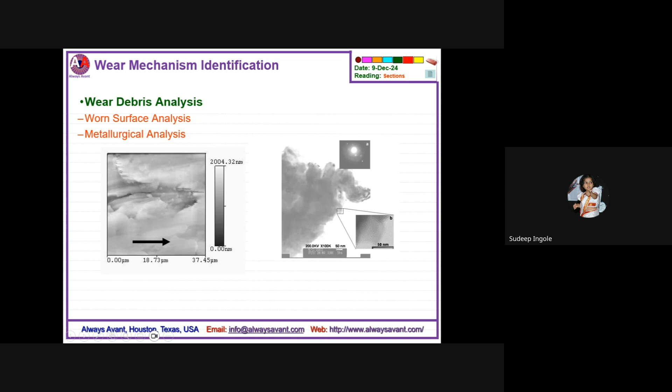With these particular tools developed, a whole new technology came into the picture, which we call nanotribology. This study is applicable to very advanced manufacturing technology, particularly microelectromechanical systems, what we call MEMS, meso manufacturing, and biotechnology industry, where the measurement tools are advanced.

MEMS involves devices at the micro level, mostly made by micro machining. Nanotechnology has a strong impact on different areas such as biology, biomedical, computing, communications, and drug delivery. It involves material at a very small dimensional scale, typically less than 100 nanometer. Manufacturing at such a minute level requires knowledge of material behavior at that length scale, and surface parameters play a very important role. When it comes to surface failure at that length scale, it becomes a very critical issue.